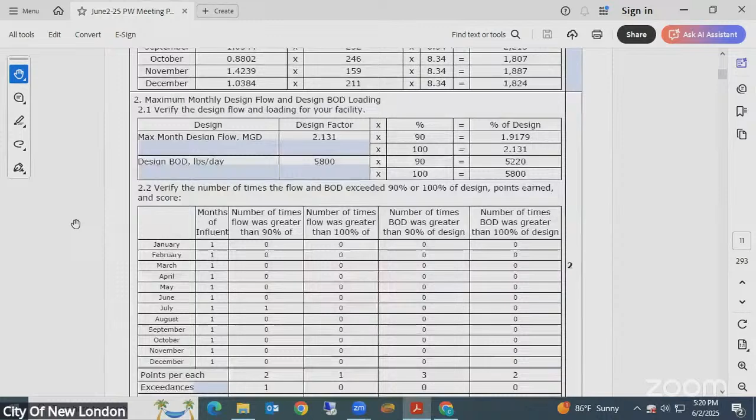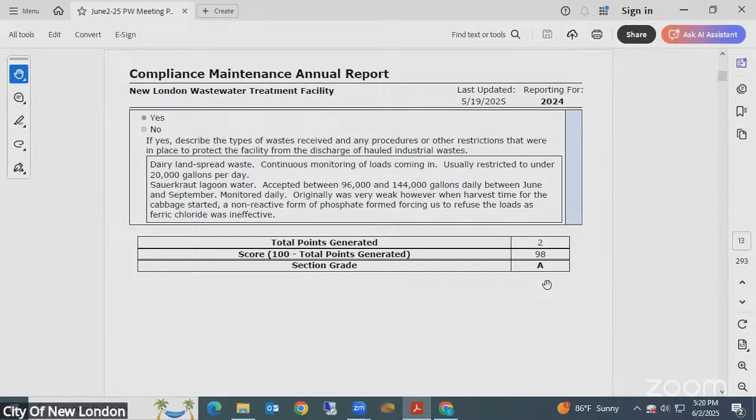Approve and recommend 2024 CMAR resolution. This is pretty much standard form, what we submitted in the past. It is talking about the CMAR report, and at the back it needs the approval of this resolution to be submitted. As Ben indicated, they have scored all A's in all sections as of now. So this is nothing more than a formality that we have done in the past with the CMAR report.

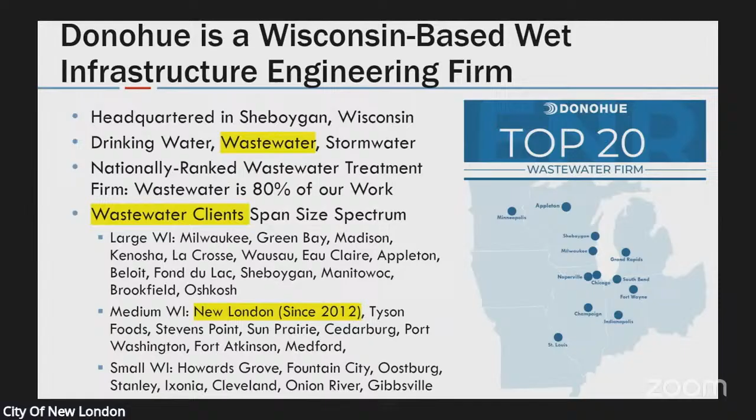But we also work at some of the very smallest. We work at a lot of medium-sized facilities like New London. And I think it's important to set the stage that we're not a consulting firm that does a lot of things and kind of dabbles in wastewater. This is the core of our business. 80% of our work is in the wastewater industry. We're really a wastewater engineering firm, and we're one of the 20 largest wastewater treatment firms in the country.

So wastewater is what we do, and we have all the disciplines in-house. We're headquartered in Sheboygan, Wisconsin - a Wisconsin-based firm. And we have all the different disciplines we need to do wastewater projects: we're process engineers, which is what I am, to structural engineers, electrical, HVAC, mechanical. And right here in the upper Midwest, we have one of the largest concentrations of wastewater treatment professionals.

So we're going to be talking about some strategies that are going to cost real money, and I think it's important for you guys to understand this is what we do. We're a firm that specializes in this.

So why are we here tonight? The reason we're here tonight really stems from EPA's approval, way back in 2020, when they approved the total maximum daily load for the Upper Fox Wolf River Basin that the DNR submitted to the EPA back in 2020. EPA approved it February 27th, 2020. And that TMDL establishes how much total suspended solids, how much solids and how much phosphorus the different dischargers in that watershed can discharge.

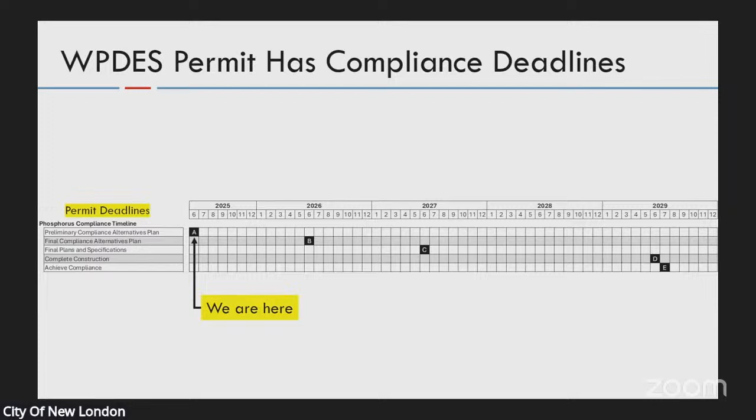So we're at the beginning of the schedule we're showing here. That's in your permit. It's important to point out that what the DNR requires isn't really a well-conceived construction schedule. If you submit plans and specs by June of 27, you need to wait for DNR approval, then bid it and award it. That doesn't leave the contractor enough time to build something. You really need to move faster than this, and we recommend that, which we show here and discuss in the report.

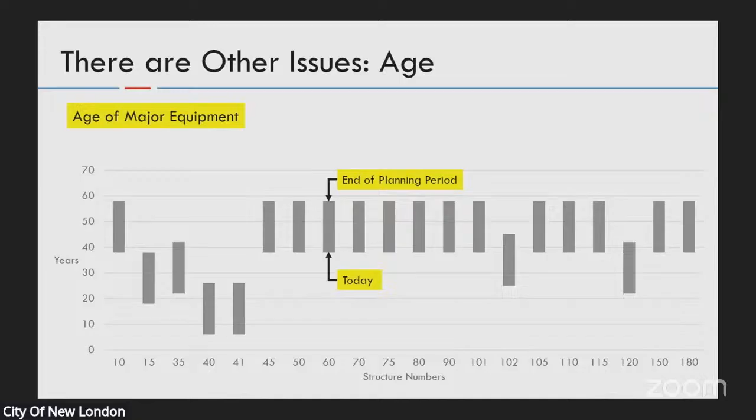Complexity in itself isn't bad. There's a time and place for it, but this plant was configured and built over the years when you had industry that's no longer here. So this complexity is really not necessary for the service area today, and likely what the service area will be over the next 20 years. Those big food processor loadings are not probably coming back. They're not here today and they're probably not going to come back. And so this plant really isn't configured very well for the service area today or for future generations.

It's a very complicated and complex facility. Okay, does that make sense?

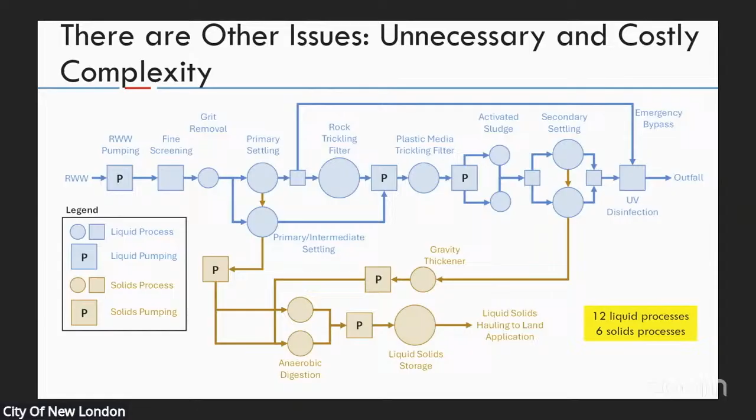So this PCAP documents an evaluation of feasible alternatives to, number one, first and foremost, meet the phosphorus limit, and then two, as I said, maintain compliance for the next 20 years. How do you get another generation of service out of there? This facility—and it's not the final plan, it's a preliminary engineering report, preliminary is the key word—hopefully lays out a well-conceived strategy for you to move forward and continue to make progress on this important issue.

Okay, so the very first alternative that we looked at, and you always have to look at, is what if we did not do anything. We established that that's not an option. You have to do something.

So the second alternative that we looked at is a way to deal with only the phosphorus issue, called the multi-discharger variance. It's a program that the DNR set up to help some communities. Not all are eligible for the MDV, but it appears that New London would be because of your median household income and other factors.

The way to think of this alternative is it buys you time. It's a variance, not a forever solution. It's a regulatory solution that buys you time. The way to think about that is you buy compliance for a number of years.

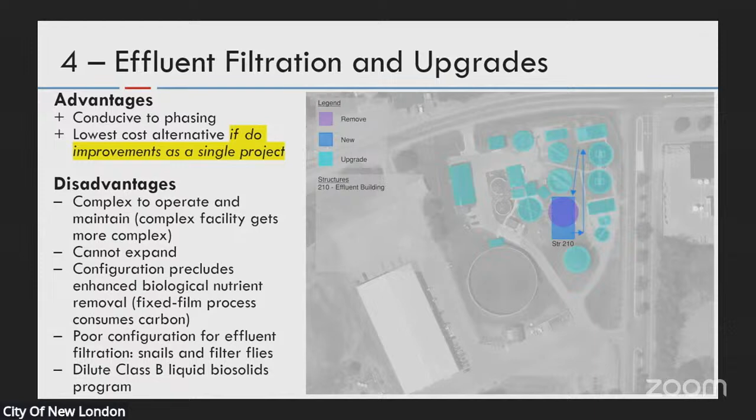And then here we're showing your plant, and now we would add more processes to this already complicated plant—we would add filtration.

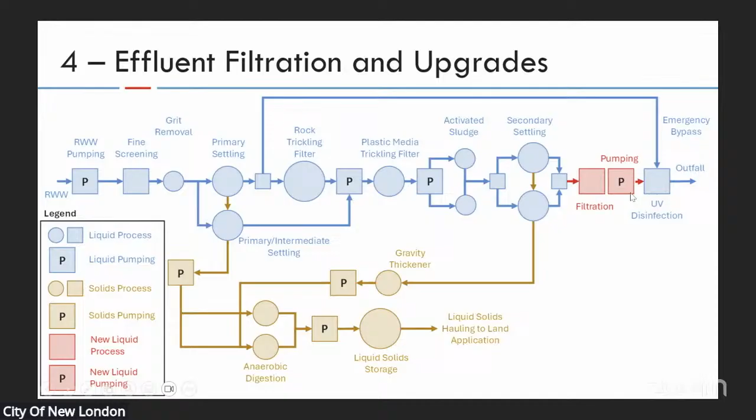Now we look at several alternatives that are drastic departures from the previous one, instead of investing in an upgrade of your existing facilities. One thing to point out: we talked about the age of the structures here. The pipes are the same age, and cast iron pipe lasts 50, 60 years, so the pipe is old, and that's also a concern. The pipe is underneath structures and goes between structures, where there's not much room. That's another consideration: the age of the equipment, the structures, and the piping.

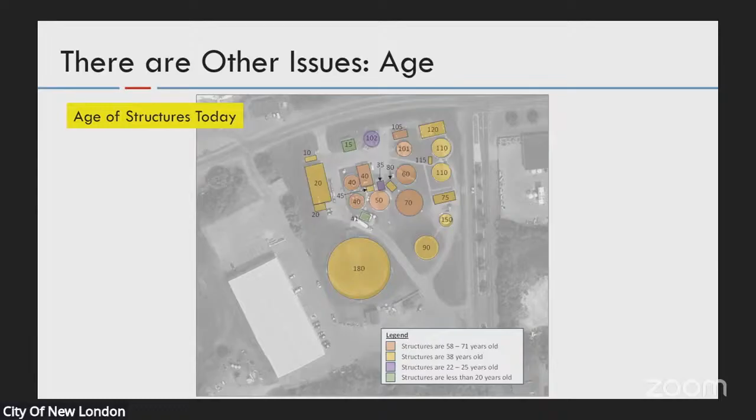This alternative looks at whether it's time to make a multi-generational investment and put in a facility that addresses the shortcomings and sets the community up for expansion, growth, and changing regulations. This alternative would be a brand new plant on your existing site, with a new liquid treatment train and a new biosolids train. There are two parts to a wastewater treatment plant: the stuff that treats the liquid, the water, and the stuff that treats and processes the solids.

Alternative 5.1 looks at building a new facility on the existing site. We also looked at another alternative, 5.2, building that new facility at a remote site, 3.7, 4 miles out of town. Because people always ask, if I'm going to spend money down here, why don't I just build a new one? You'll see why in a little bit—it adds a lot of cost.

Some of the advantages to this alternative: it's simple to operate and maintain. You would continue to use the pumping station, one of your newer structures, and some of the pumps have been replaced recently—it's in very fine shape. That would pump up to a new headworks, a new screening building here. So you'd use this raw wastewater pumping station and pump up to a new screening structure.

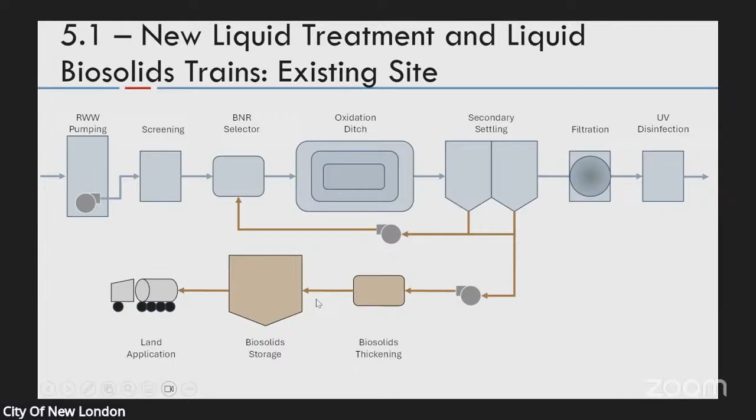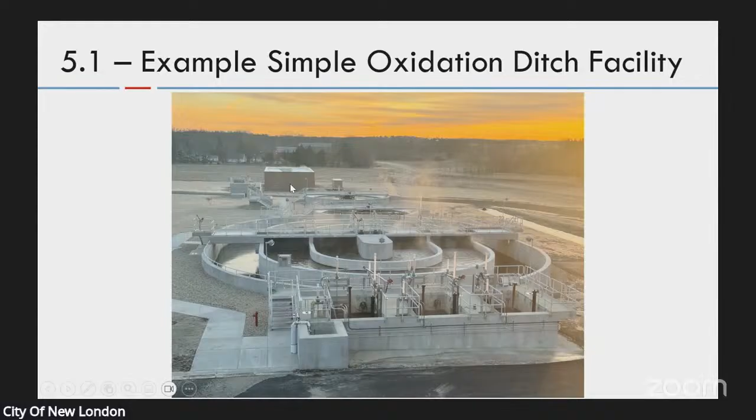Just to show a real world example, this is the same plant, Ixonia. The modular nature means if the day comes that Ixonia needs to expand, they would build a mirror image liquid train, a new oxidation ditch, two clarifiers, and expand the building. This highlights the modular nature, which anybody investing real money in a facility should want it to be—expandable.

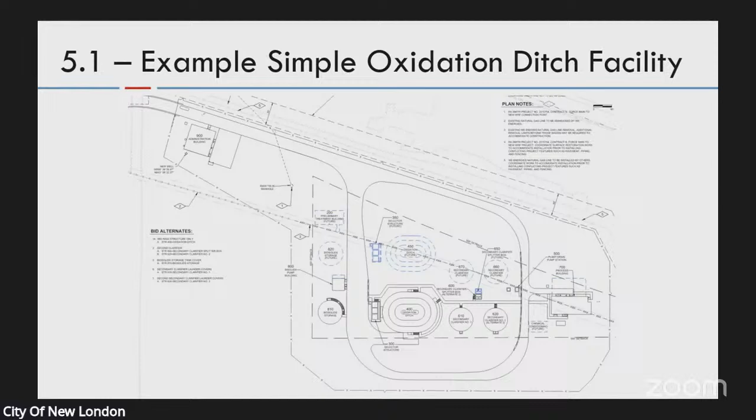Oxidation ditch, BNR selector, pump station, screens, clarifiers, UV disinfection, filtration, and out. Here we added a biosolids dryer. So from a biosolids perspective, this alternative is very different. We would remove 90% of the water in the biosolids and make a dry product.

We would do that in a way that produces what's called a Class A, Class AEQ material, which means it's unregulated once you produce it. So you'd make this Class A dry product, probably pellets like Milorganite. Has anyone used Milorganite on their lawn? It would look a lot like that, and you probably wouldn't bag it and sell it to anybody, but what we've been doing in other facilities, you put it in a silo, and a local agricultural operation would say, I'll take all of it. They would come out, take it from your facility and haul it out to their operation and use it whenever, however they want.

It's no longer regulated, so you no longer need fields. You wouldn't have to keep track of where it's going. You just say, come and get it, and you can take it for free. And your biosolids costs then go to zero. Your land application costs go to zero. And that's been proven throughout the state.

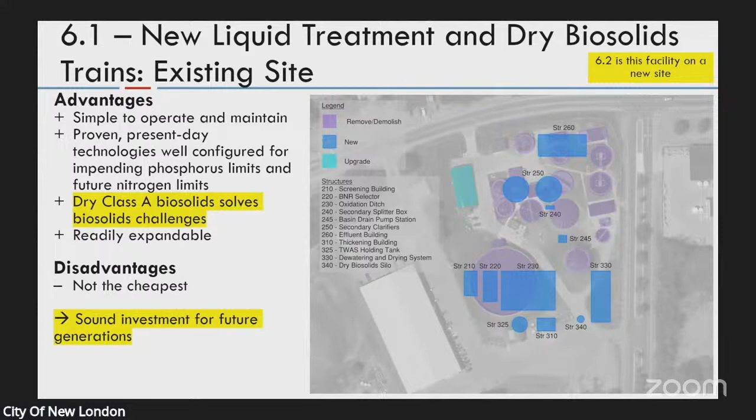In fact, Sheboygan, Wisconsin, where they have a dryer, we helped them put in a dryer, they actually bid out their biosolids and make a little bit of revenue, $150,000 a year or something like that. So that's the fundamental difference with this alternative is it adds drying.

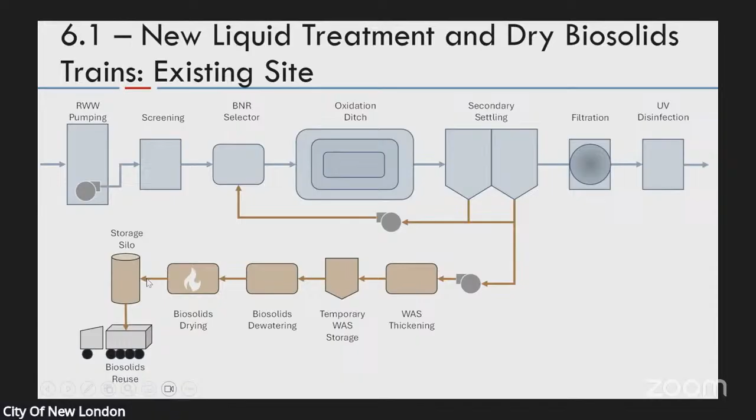And we can see that here, same liquid train. Biosolids come off the clarifier, we thicken it, we hold it for a little bit for a couple weeks, and then every couple of weeks, the staff would say, now we're going to dry the material, they would dewater it, send it through the dryer, put it in a silo. Somebody else would come and haul it away.

So this isn't some crazy idea that somebody had for New London. There's been a huge proliferation of dryers throughout the state. And I think we've designed now 7 or 8 here in Wisconsin—Beloit, La Crosse, Sheboygan, Wausau, Kiel, Wisconsin has one. Kenosha has one, we designed those, but then others, River Falls is under construction. Lake Delton has had one for years. Reedsburg is putting one in. So because of the biosolids challenges that Ben has probably talked about for years, there's been a proliferation of drying here in the state.

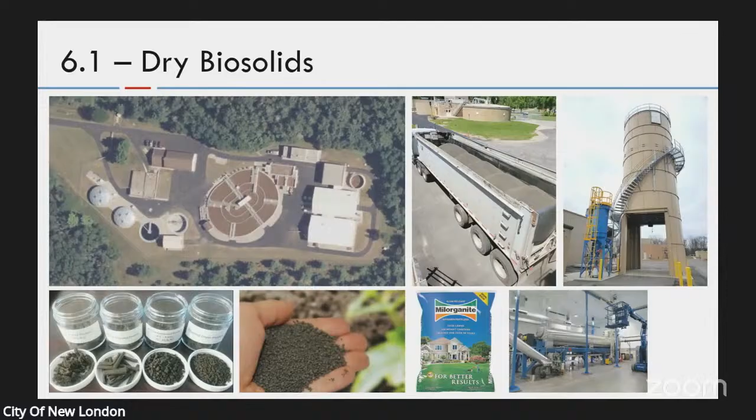Okay, time to talk about costs. As I said, the MDV may buy you some time. It's a variance, so it's a finite term that solves a regulatory challenge. And we would suggest, so that you have all the information in front of you, you know what you can and can't do with certainty, that we would suggest you pursue the MDV with the DNR and confirm two things.

One, your eligibility. So we did what we could. We went on the DNR's website. There's a form you fill out, and median household income and watershed and all these different things, what your limits would be. And what pops out of that is, yeah, you probably are eligible.

So to get confirmation, you need to work with the department, and we suggest you do that. And then number two, how long is the variance likely to provide regulatory relief? How likely is it going to expire in '27? Are they confident it's going to expire, or are they confident it's a real alternative, possibly to 2035?

Ben pointed out that we looked at a record of 4 or 5 years worth of flows, and the worst case scenario in that period was about $69,000 of an annual payment. But there could be an extremely wet year that would make that amount more. I think it's a reasonable perspective, but it could be more than $69,000 a year, though it's in the vicinity of that.

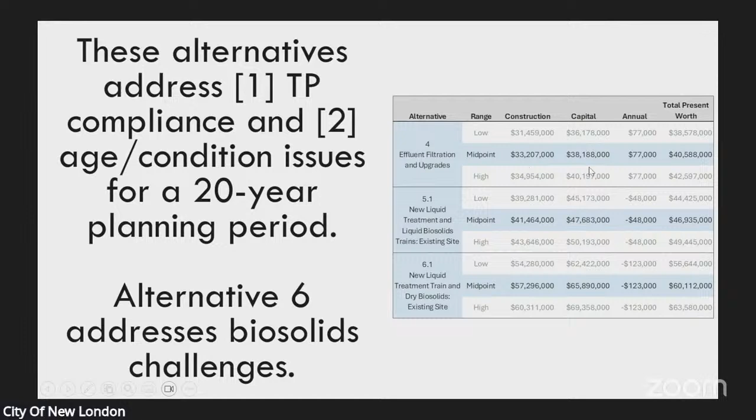We talked about, and it's always important to look at how big those numbers are, tens of millions of dollars—it's natural to say, why don't we just build a new plant outside of town? We wanted to provide that perspective. Invariably everybody wants to know that when they have an old facility, and sometimes people decide to do it, but in this case, it would add $20 to $25 million.

Everything flows down here today, and you'd have to get all that flow to some other facility, buy a site, pump it out there, get a new outfall to the stream, and build a new administration building.

It would add $20 to $25 million. So I think we provided that really as perspective, not any recommendation, unless the community felt it was important.

From a wastewater treatment perspective, you'd have an expandable facility that can readily accommodate more stringent effluent limits. From a treatment perspective, there's no reason to build a new facility outside of town. It would have to come from other reasons inside the community.

Does that make sense? Those were huge capital costs, enormous capital costs. But I think decisions like this are ultimately made on what it's going to mean to the typical residential user when they pay their bill. And that's what this is attempting to do, is provide that perspective.